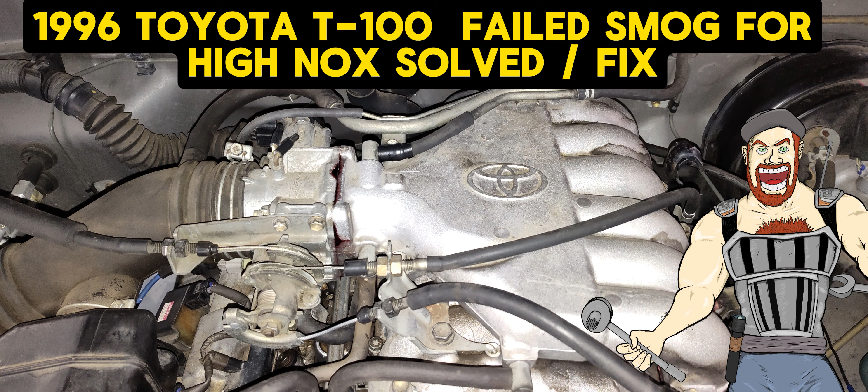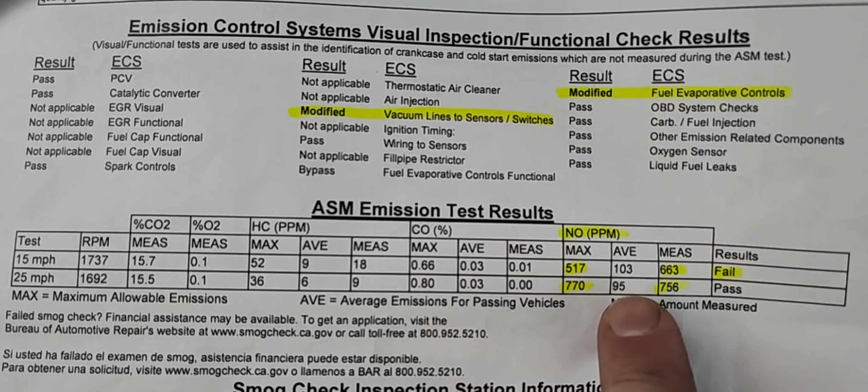1996 Toyota T100. I got a truck here, fails smog. It's failing for NOx only, and I'm going to show you what I did to fix it. So I took it to smog. It failed right here for NOx, way too much high NOx. Only NOx though. Everything else measured good, which is good because that's an indication that the cat is working. I'm going to show you what I did to repair mine and make it pass smog.

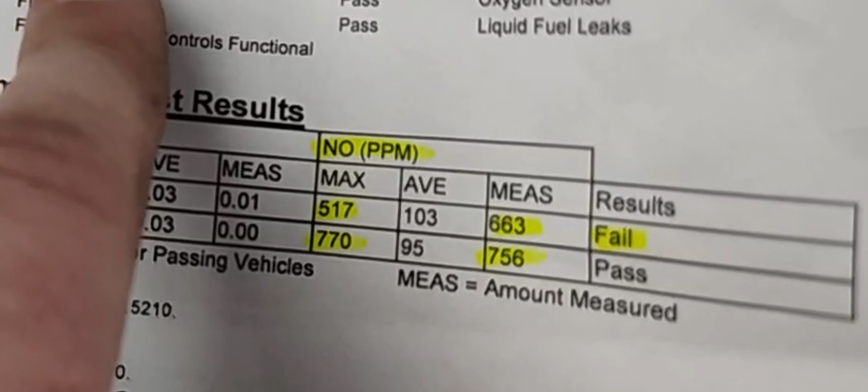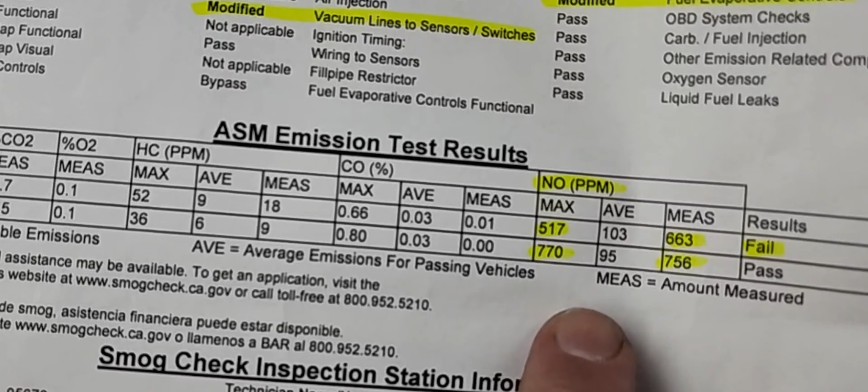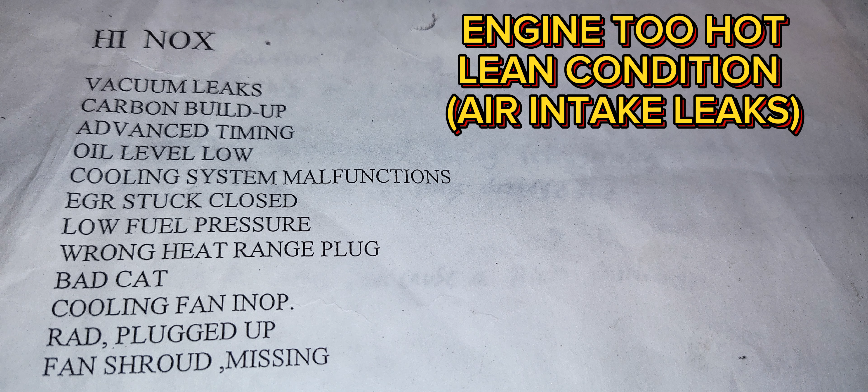Now, what causes high NOx? Vacuum leaks, carbon buildup. If the engine is running hot, if you have any cooling system problems, like a plugged radiator or you're low on coolant or oil, that could cause it. Also, air intake leaks that cause a lean condition. So what you want to do is come in here, make sure there's no rips in your air boots, make sure that there's no air intake leaks, make sure your coolant system is tip-top.

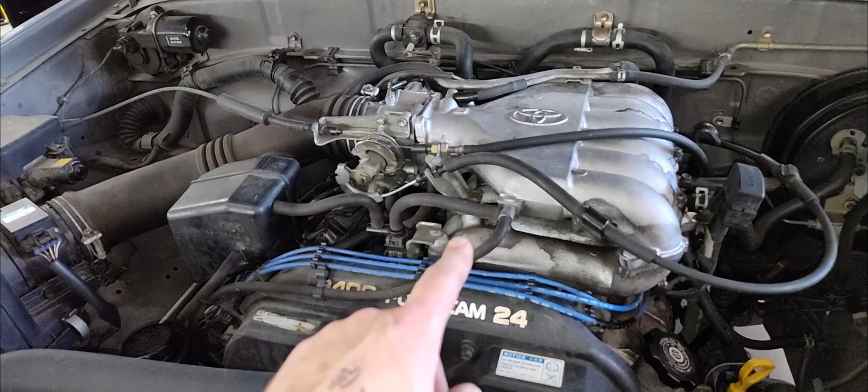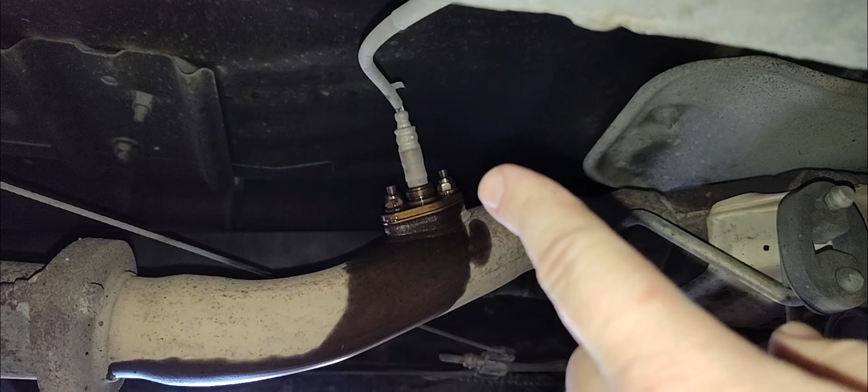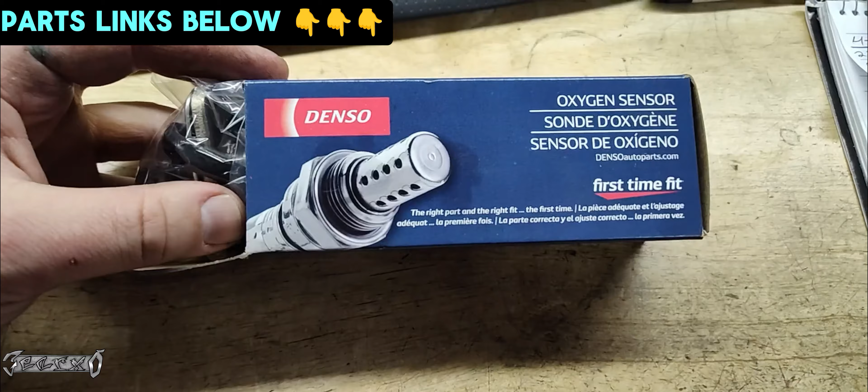These are just the basics that you would check before focusing in on your O2 sensors, but mine was all good, so I went underneath and I seen my rear O2 sensors. These were like the OEM ones. This car has over 200,000 miles on it, so these guys are old. I have a video on how to replace the O2 sensors. I also have the parts linked below, and they're also linked on the video that I made.

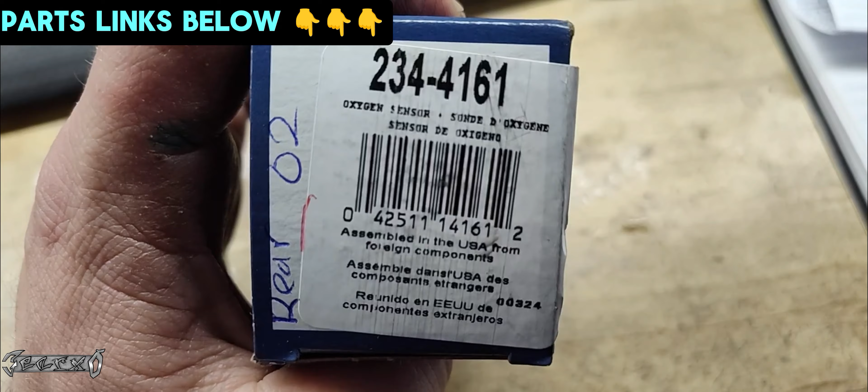So the front one, you can still get a Toyota OEM one, which I highly recommend, and the rear one has to be DENSO because Toyota stopped making the rear O2 sensor. But here's the part numbers, they're linked below, and the gasket if you need an extra gasket. Usually the sensors come with a new gasket, so you don't need to get this.

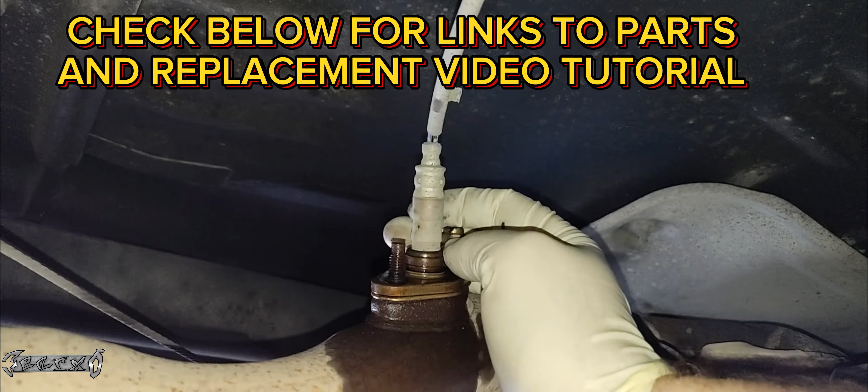But yeah, check out my video on how to replace the rear O2 sensors. I show how to do both of them, and then after that I went and got it smogged, and everything else was working properly, so it passed smog no problem.

And this could also be used for Toyota Tacomas, Tundras, any kind of Toyota truck that was from the 90s. These O2 sensors go bad. They're kind of like the only sensor on a car that could get tired and kind of lazy and stop working as good. Other sensors, when they fail, they just fail straight up. But anyways, guys, check the link below for the replacement, and I'll see you there.